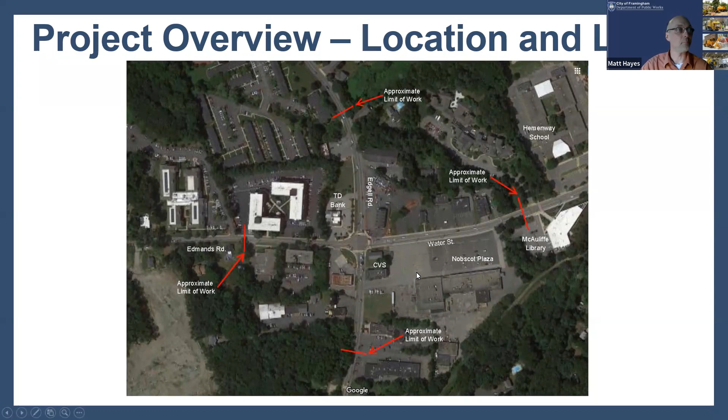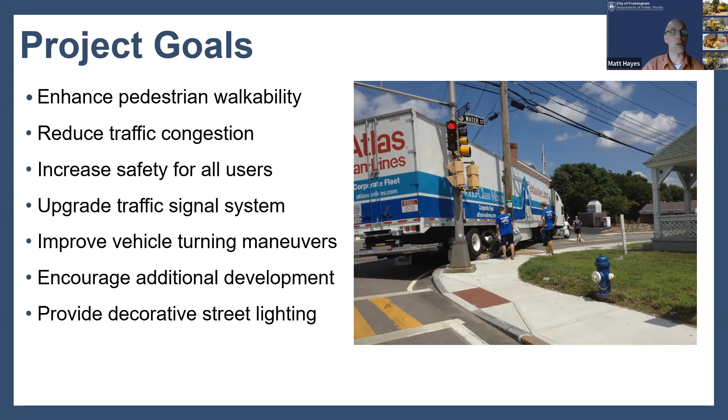The goals of the project are to enhance pedestrian walkability, reduce traffic congestion, increase safety for all users—vehicles, pedestrians, bicyclists—upgrade the traffic signal system, improve vehicle turning maneuvers so we don't have this picture on the right any longer, encourage additional development, and provide street lighting.

This is an overlay of the improvements on the previous aerial. This is a high view of the project, so you may not be able to make out too many details—I can go over any of the details if you have further questions. The project will include new signals, new decorative pedestrian crossings on all four legs and approaches to the intersection, fully ADA-compliant walks and wheelchair ramps, left turn lanes on all of the roadway approaches, and wider turning radiuses to accommodate larger vehicles through the intersection.

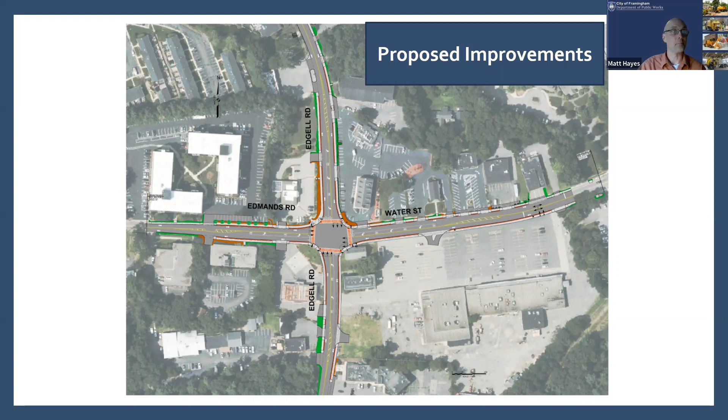As most of you are probably aware, having driven through the intersection lately, our contractor, Balthazar Contractors, resumed work in late March. They are currently installing underground conduit for street lighting, as well as handholes and concrete bases for the street lighting. The overhead traffic signals have been installed by their subcontractor and are mostly wired up to the controller cabinet. We're just waiting on some further utility relocations in order to energize that system, so that will be later on this season.

Some of the work completed last year included drainage work and culvert repairs to the culvert on Edgell Road, installation of the foundations and mast arms, which was actually done over the winter, and the gas main installation by Eversource Gas, completed within our project limits last year. However, Eversource has come back this year to continue to install and upgrade the main along Edmonds Road to the west of our project limits.

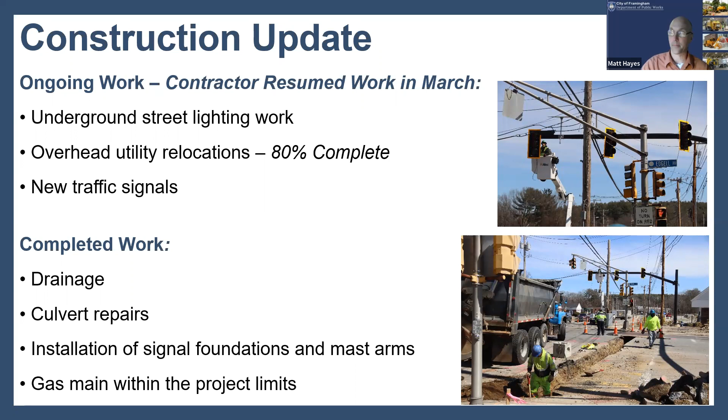Some of the project impacts we can expect: first, we anticipate substantial completion of this project late fall of this year, and final paving of the entire project early in 2023, in the spring. The hours of construction are the same as they have been last year—crews will be out there Monday through Friday, 7 a.m. to 3:30 p.m. The traffic impacts will include some lane shifts or alternating traffic on some lanes during construction.

We have been utilizing a detour through the CVS parking lot, through the perimeter road, when it has facilitated work mainly along Edgell Road to the south of the intersection. So we have traffic going through the CVS parking lot and northbound traffic on Edgell Road. The work is anticipated, again, only during daytime hours, similar to last year, and all the traffic as well as the construction is being monitored daily by the city.

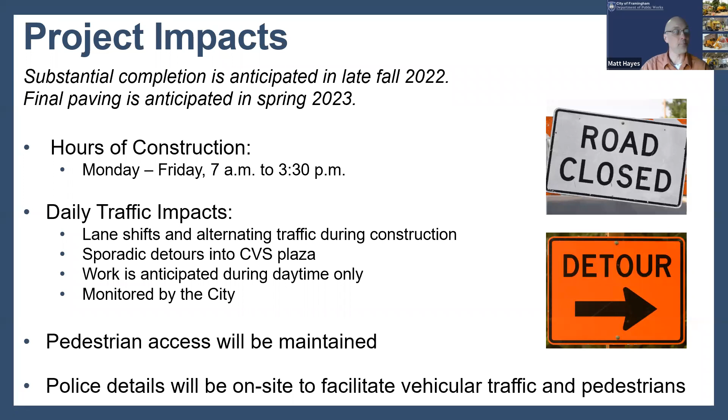Pedestrian access will be maintained. There will be impacts to sidewalks at certain times as they're reconstructed, but sidewalk access will usually be available on the other side of the street. Police details will be on site to facilitate vehicular traffic and pedestrians. Framingham Police have been doing an outstanding job so far on this project.

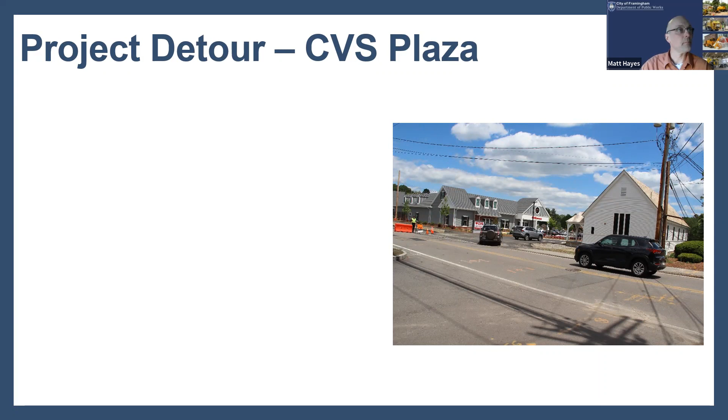The second detour route planned for the project utilizes Genardy Way, Livoli, and McAdams Road. This will be a two-way detour when work is required on Edmonds Road because of its narrowness. When we're working there, especially during the reclaim portion of the project, we won't be able to have even one lane of traffic. So eastbound traffic on Edmonds Road will be detoured south on Genardy, south on Livoli, then east on McAdams Road to meet up with Edgell Road again.

Traffic wanting to go west on Edmonds Road from the intersection will again follow that route in reverse, Edgell to McAdams, Livoli, north on Genardy.

Currently, the gas company is working just east of Genardy Way, and they have been detouring eastbound Edmonds Road traffic south along that detour route. They've been able to work with one lane of westbound traffic going by their work zone, and have police details on site directing traffic down Genardy Way for that reason. They're also allowing school buses, abutters, and emergency vehicles access through Edmonds Road.

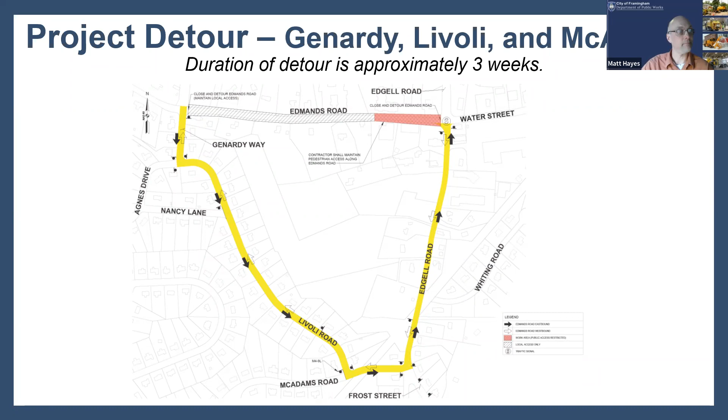So our construction schedule for the remainder of the project: as I said before, the installation of streetlights and traffic signals is occurring right now, expected to be completed in the spring. Final street lighting won't be installed until later in the project. This is mostly underground work being done now.

Pavement reclamation will occur, with July 18th as our anticipated reclaim date as of today. Reclaiming of the pavement will be done on Edmonds Road and Edgell Road, north and south of the intersection. Water Street will not actually be reclaimed, but the pavement will be milled off and repaved. Excavation for roadway widening and curb and sidewalk installation will occur later this year, and final paving is anticipated in spring of 2023.

Utility relocations: as I mentioned, the Eversource gas work is complete within our project area. We're still working with Comcast and Verizon to relocate the aerial cables they have on the existing utility poles onto the new poles that were set for the project. Once Comcast is completed, anticipated next week, Verizon will come in, relocate their aerial plant, and once that's removed, the utility poles will be removed.

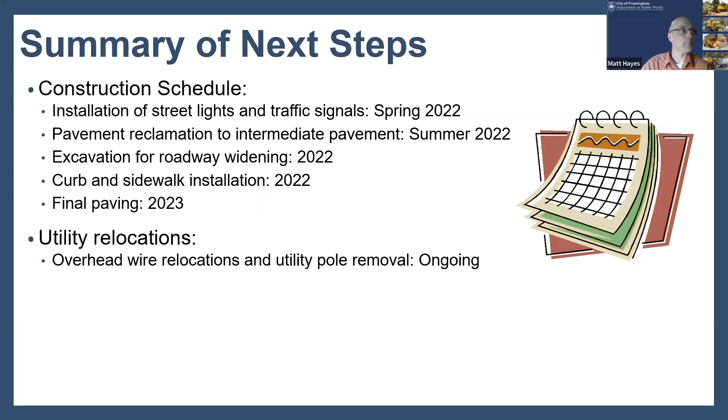And that completes my presentation for the project. I wanted to turn it back over to Alyssa to go over some of the ways you can contact us, and then we'll go into questions.